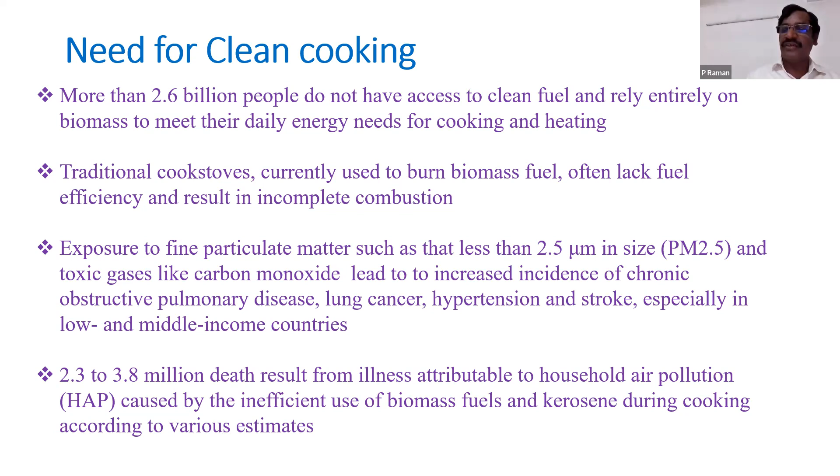There are a lot of arguments and discussions on how valid these numbers are, but the reported number is 2.3 to 3.8 million deaths resulting from illness due to household air pollution. And household air pollution basically means the polluting equipment in the household, which is the cook stove. So inefficient use of biomass fuels and kerosene during cooking has a lot of health impact.

When we talk about clean cooking, what options do we have in hand? One is the biomass cook stove, and there are two categories. One is the conventional cook stove. In my experience, wherever I visited in African countries, India, or East Asia, more than 70-80% of the cook stoves are conventional biomass cook stoves. Improved cook stoves are also there, but they are limited in use.

Why? There are some factors. Improved cook stoves demand certain things like small electric power to run a fan. Improved cook stoves are generally known as small gasifier cook stoves also. So the cost of a conventional cook stove versus an improved cook stove drives the choice toward the conventional cook stove. Everywhere, the cost and economic factors affect the selection of cook stove.

Next to biomass cook stoves, we have LPG or PNG cook stoves, mostly used in urban areas. And then the solar cooker. Within solar cookers there are different types: the box type and the dish type or concentrated cookers. A solar cooktop is the one we will talk more about in this presentation. That is the upcoming technology. So far I have not come across such a solar cooktop apart from the electrical one, particularly a solar cooktop using thermal storage.

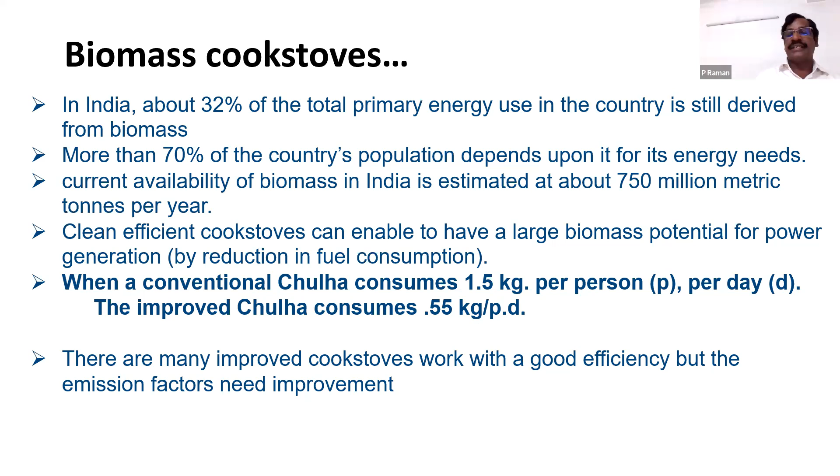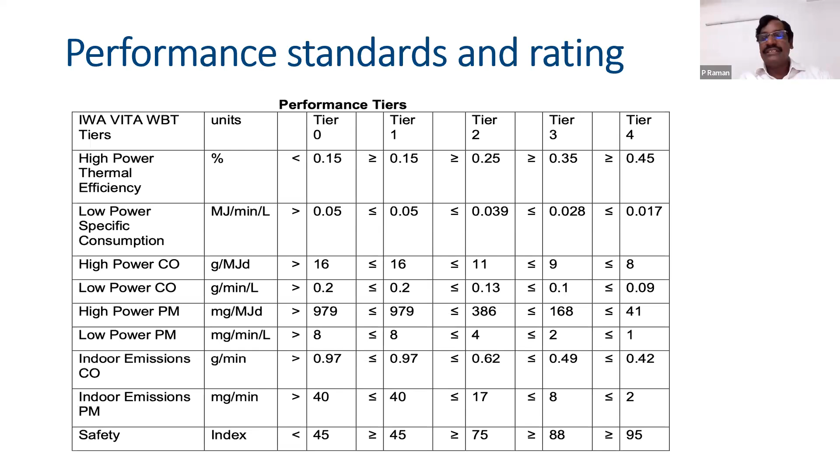So this is the one standard which is followed across the world. The effort is to make the biomass cook stove as good as the LPG cook stove, to take it to tier 4.

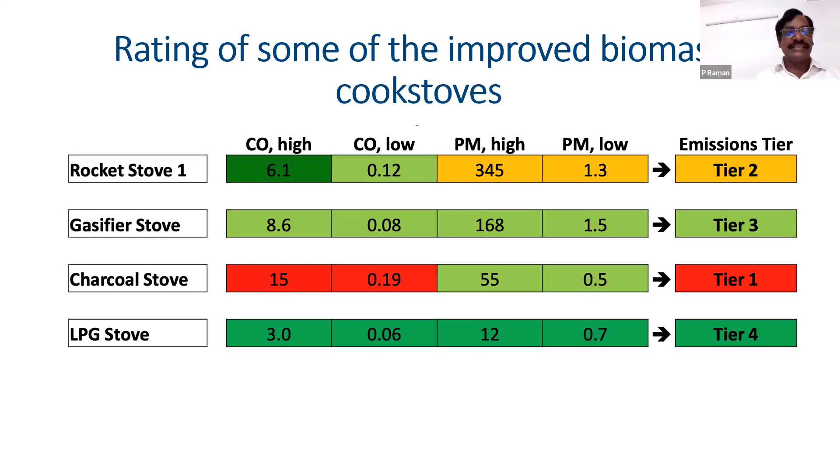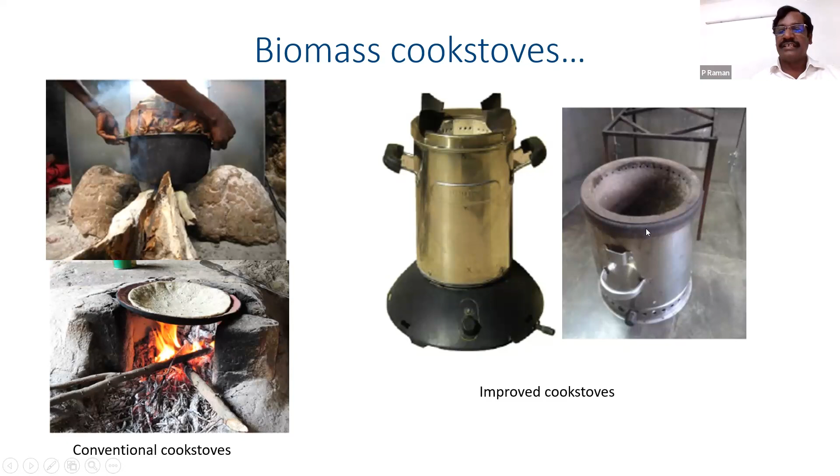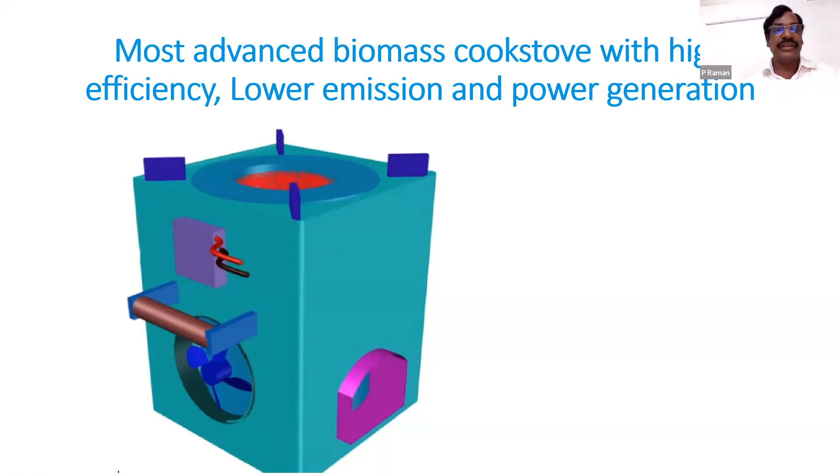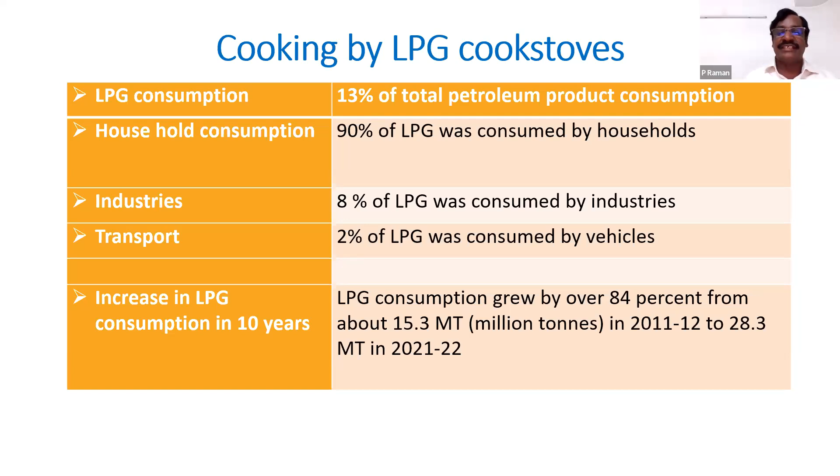Clean cooking using solar will reduce this kind of data, because it's very clear 90% of LPG is consumed in households. So when we put a significant fraction using clean cooking solar cooktops, a large portion of the LPG can be reduced. This will give a clean cooking environment in the house, as well as have an impact on climate change, avoiding carbon emissions.

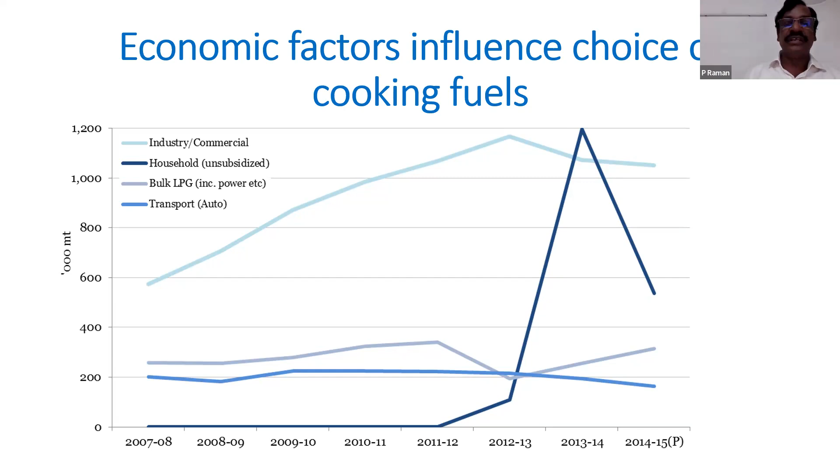This is about the influence of cost and subsidy. The dark blue line is about LPG. There was a big peak when there was a policy with large-scale dissemination of LPG cook stoves and cylinders. There was a big peak during that program, and then a fall based on cost again. So what I want to say is that policies and programs influence cooking options and cooking fuel a lot - policy subsidies and the cost of fuel are large influencing factors on selection of cooking options.

This is the reason a lot of Western countries are shifting from LPG to electric cooking. I think in several places in the US and UK, and some other countries, they've already shifted. Maybe in India also this situation may come, because earlier pollution from LPG cook stoves was not talked about much - this was a recent development, and it's drawing more attention to the need for clean cooking.

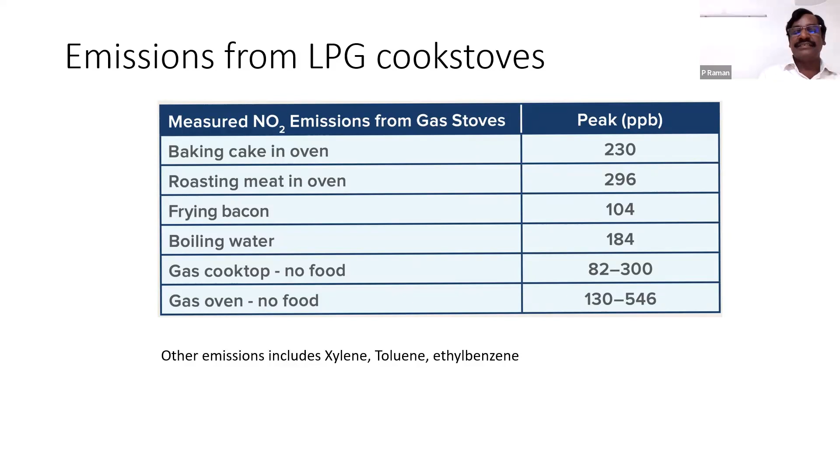Right now people take the option of electrical cooking, but beyond electrical, maybe the best option is solar cooking. That's why I selected this subject - to put it forward so more people may get involved, and in future we should be able to see more solar cooktops. So the key message of this slide is that LPG also has a lot of harmful emissions, and it needs cleaner cooking beyond LPG.

Based on the problems related to biomass or LPG cooking, e-cooking is being introduced in many places. Even in India, in February 2021, the government launched the Go Electric campaign to create mass awareness about the benefits of e-cooking devices. There were some programs and projects here and there, but there is still a long way to go as far as electric cooking is concerned.

One issue is the cost of electricity, and again if you go for PV, there's the cost. But with continuous effort, when the scale is larger, the cost can come down.

The Power Ministry also plans to develop an aggregation model for electric cooking systems to promote adoption by making it affordable and covering as many households as possible by 2030. There is a target, so on one side we have a target and a policy, and the policy should be effective and conducive to achieving that target. The gap between the target and the achievement should be minimized.

So for e-cooking, there is a policy in place and targets in place, but a similar thing is needed for the solar cooktop also. E-cooking mainly means induction cookers. There are several electric cookers available, but presently when we say e-cooking, it mostly means a pressure cooker and the induction cooker.

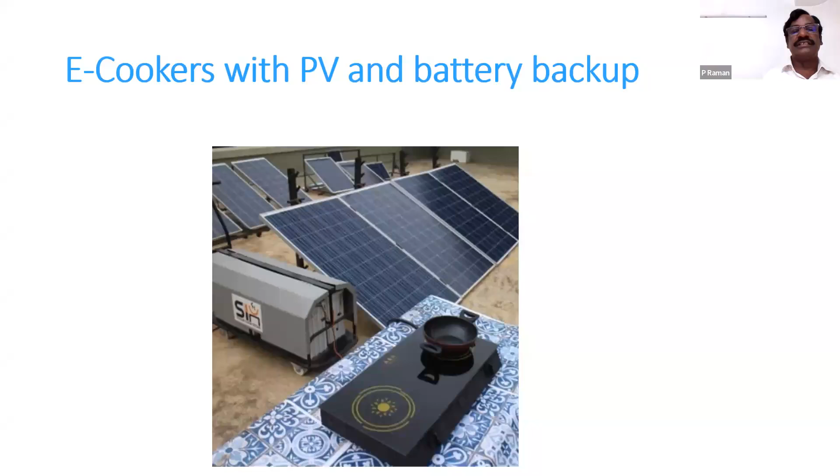Another form of e-cooking is with PV and battery storage, which is commercially available in India also. The cost is closer to 65,000 to 70,000 rupees, but somehow this cost should be brought down. This model has maintenance requirements related to the life of the PV and the battery particularly the battery's life after a certain period. But if you take the thermal route, there isn't too much post-installation expenditure on maintenance.

Now we will go to the solar cook stoves. As mentioned in the outline slide, we categorize solar cook stoves into two types: the box type cooker and the cooker with concentration, the dish type cooker. Most cook stoves are designed to cook in the open area.

The biggest drawback of existing solar cookers is that they are placed either outside the house, in front of the house, or on the terrace. So people have to go outside and cook in the sun. The solar radiation receiver is integrated into the cooking vessel.

In the concentrated cooker, it works similarly. A solar cooker can only be used during sunshine hours, so there is no flexibility. Whenever the peak radiation occurs, we have to go stand outside and cook. These are all challenges.

This is likely why the technology could not be adopted at a large scale. There are some solar cook stoves with storage also, but the cooking and storage happen outside the house or on the rooftop, so we still have to go up there and cook whenever needed. There is no control on cooking power whoever is cooking knows very well that we have to control the cooking depending on the dish and the time.

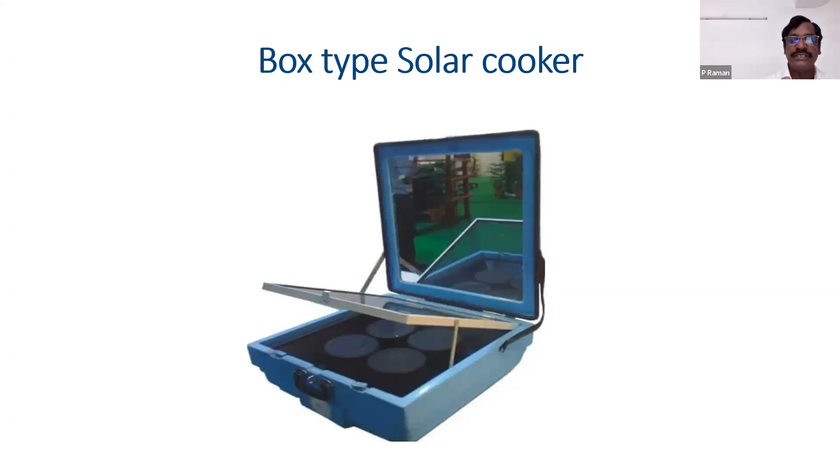And this is one of the cookers we can see this is a box type cooker kept outside, as I mentioned earlier, near the stove.

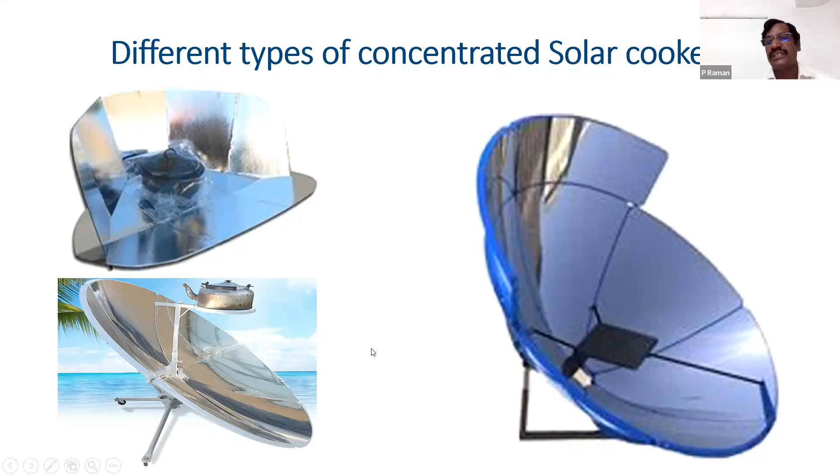So people have to come out and cook in the stove actually. So in addition to the cooker, people also have to stand under the sun with the heavy radiation. So different types of concentrated solar cookers are developed, because a lot of research has been done in this also. You can see two to three types of cookers in this area. But as I told earlier, one has to stand next to the cooker and work on this thing.

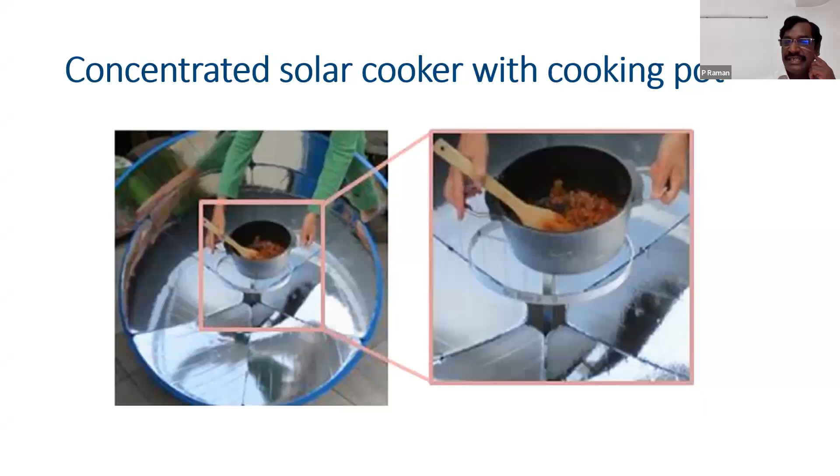Here also we can see it is already concentrated, right? This place will be very hot, but still people have to put the vessel and cook. So this inconvenience acted as a big barrier to take up the concentrated solar cooker. So this is the new proposed solar cooktop with thermal storage, with hybrid thermal storage. Why I said hybrid, I will explain later.

If you see the components here, the solar cooker, the concentrated parabolic collector, is very much existing. It's similar to what we have seen earlier in the slides. And the receiver is modified here. There are two loops of thermic fluid in this one. One loop is to transfer the heat from the solar concentrated receiver to the storage system, and another thermic fluid loop is here, which is to transfer the heat from the storage system to the cook pot section.

So here, what happens is in the daytime, the solar energy is received here and it's stored in a thermal storage medium. There are several storage options like thermic fluid or other things. There are many materials that I will get back to later. So there is a storage system here, and the thermal energy is stored here. There are two high temperature thermic fluid pumps in the system.

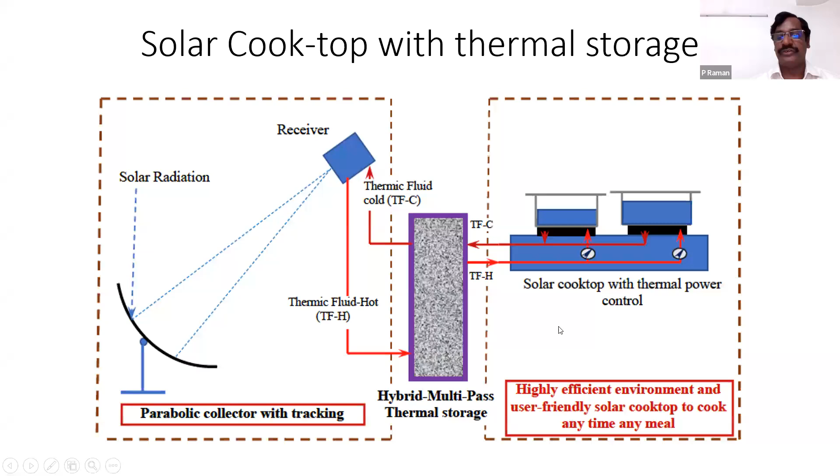So we have to think about what new technologies we should be getting, and at the same time what new products have to come. The products and technologies should be adaptable, cost-wise and convenience-wise, for people to use on a large scale. And regarding the status, it is not new, either the storage in thermic fluid or other things, but here I propose hybrid storage with the concentrated collector.

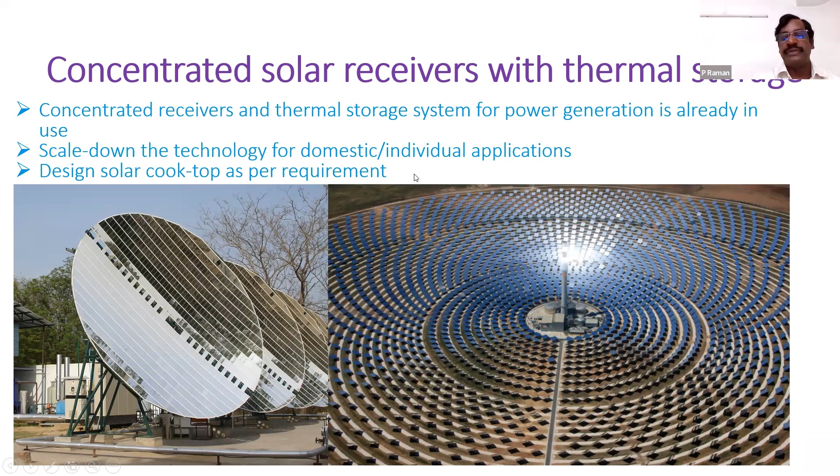In this presentation, what we are emphasizing is to use the existing technology at a scaled-down level for domestic cooking applications: a concentrated receiver, hybrid thermal storage, and a cooktop. So that is the one. Basically, scale down the technology for domestic and individual applications, and design the solar cooktop as per the requirement, depending upon the cooking applications.

Here, when we go for that hybrid thermal storage system, what are the choices available? Why hybrid, actually? Because right now, mostly what people use is either thermic fluid or molten salt. In molten salt, the salt has to be kept in the molten form around the clock. Suppose for 4 or 5 days there is no sun, then the molten salt is heated through external electrical sources or external energy input to maintain it in the molten form. Because once it is solidified, that's all. Then restoring the system is not that easy.

So when we see the storage medium, one is thermic fluid, and another is molten salt. Dry sand is used, and wet sand is also used depending upon the temperature application, and gravel or stone chips, and some people even use graphite for the storage. So these are all already in use in different forms, maybe in 1 or 2 plants; they are not very popular.

For example, in Italy, on Sicily Island, I visited one power plant. There they use dry sand for the thermal storage. The sand is raised to 700 degrees centigrade, and water is passed through the hot sand to generate steam, and the steam is used for power generation. It was about a 500 kilowatt system. So these are the technologies available.

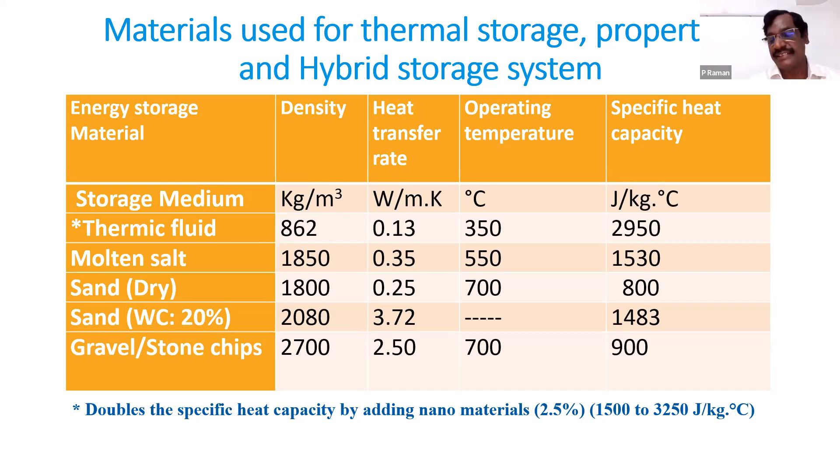Because once we have the best storage system, it enhances the cooking options, cooking at any time, any meal. And it increases the convenience also. So I have just talked about this hybrid thermal storage.

If you see the cost part, the cost of sand is ₹4.5 per kg, while the cost of thermic fluid is ₹250 per kg. Imagine, more than 50 times higher. And both can be used for thermal storage. We have to see the fractions, the combinations, how to use these things.

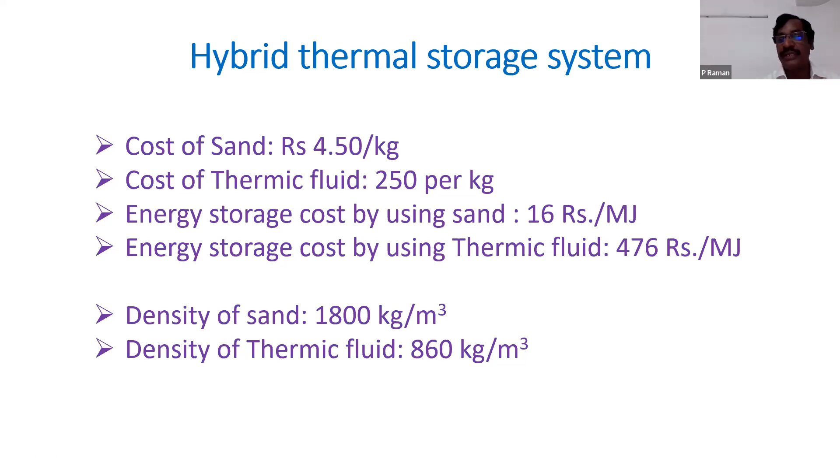And as I discussed, the density of sand is 1800 kg per meter cube, and the density of thermic fluid is 860 kg per meter cube. So the density should be high, at the same time the specific heat should also be high, and the cost should be lower. We have to consider all the factors when designing the hybrid thermal storage system.

To summarize the features of the solar cooktop, there are several features. The solar cooktop will be in the kitchen, like LPG or PNG cookstoves, with clean cooking and without any emission. The solar energy receiver will be on the rooftop, or can be fixed on the south wall, like TV dishes actually. The thermal storage system can be located either in the kitchen or on the rooftop, depending upon the

convenience. It can be put anywhere because there are two pumps transferring the heat from the thermal storage to the cooktop. The solar cooktop can be used for two-vessel cooking at a time, as with LPG stoves. Power input can be varied as per user requirement. Cooking can be done anytime, as in the case of LPG and PNG cookstoves. No need to cook only during sunshine hours.

Cooking can be done, as I told, anytime, any meal, no restriction on the type of meal, and it is comfortable in cooking like LPG cookstoves, and can have more user acceptability unlike other solar cookers. So whatever challenges are associated with the existing solar cookers, the solar cooktop overcomes those challenges actually. Suitable to use for urban as well as rural applications.

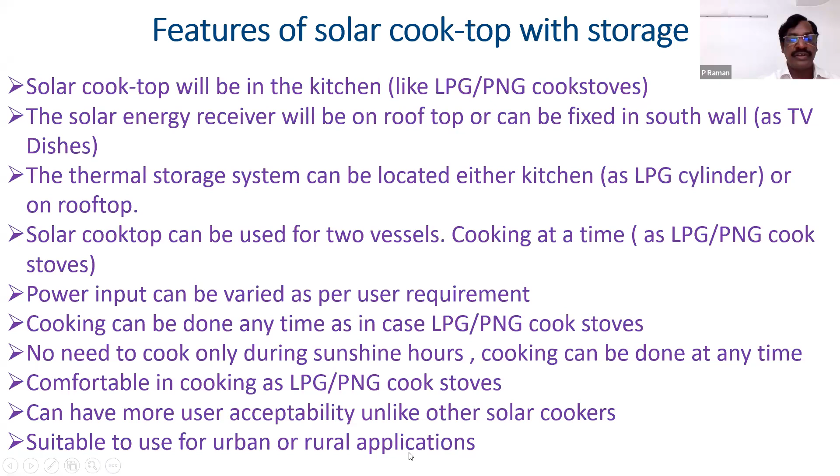And the way forward is like this: an encouraging and target-oriented policy like e-cookstove should be in place for large-scale use of the solar cooktop. Support for product development and demonstration. See, product development and demonstration are both very important. Everything cannot be done by private companies or private parties. Somewhere government policy should be embedded, and some financial support also. And there should be more demonstration systems so that people see, believe and buy this.

And then the conclusion: we can see the choices and where they stand. The solar cooktop is the best option among the available cookstoves for clean cooking actually. If you see clean cooking, one is the electric cookstove by PV, and another one is the solar cooktop. These two cookstoves are really clean cooking, because electric cookstoves using coal power we cannot really call clean. It is clean cooking in the kitchen, but it pollutes somewhere else, in the power plant actually.

So the two cookstoves here are the electric cookstove by PV and the solar cooktop. But the solar cooktop has many advantages over PV, because of the storage, batteries have to be replaced, and cost-wise everything, because the solar cooktop can be designed competitively with the cost of the PV-based electric cook system.

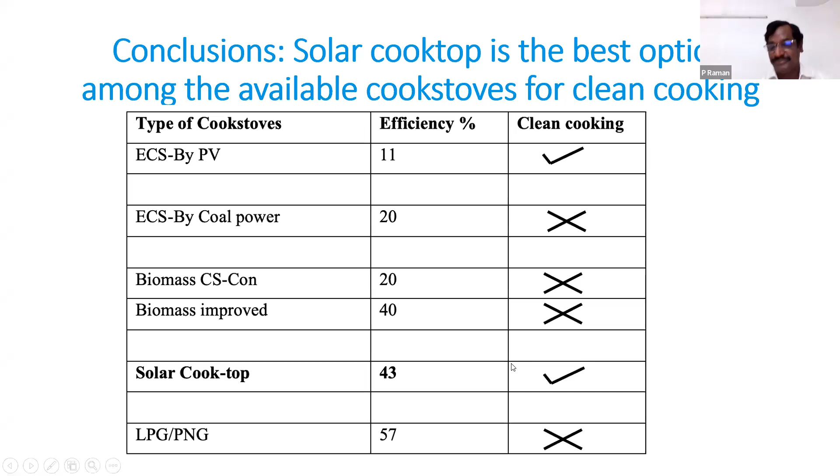Thank you very much. Yeah, thank you very much. It was a very vivid description of the entire clean cooking sector, the way you covered all the devices and finally focused on this.

But this system has to be cost effective. Don't you feel that cost will be a major factor? We have so many mass cooking systems using the Arun dish. Even Akshardham has it. In other places also we have thermal cooking on a mass scale. But for domestic use, don't you feel the cost will be a big factor?

The cost will not be a big factor because right now a lot of new technologies have come for the dish part, particularly FRP dishes. And the storage medium also, when we go for a hybrid, that will reduce the cost. If you rely only on thermic fluid or molten storage, it will have a large cost. But using hybrid thermal storage will reduce the cost a lot. It will be much more competitive.

The solar PV based system is coming to around 70,000 per cooker actually, but by my estimation, though I have not gone too much into the cost part, this will be much less than that actually.

So is this project you are doing on your own, or is it supported by the government? Right now I'm working on the modeling. There is no support from the government side, but I'm looking for support actually, because this type of project doesn't need much cost, if you compare it to other large ones like hydrogen.